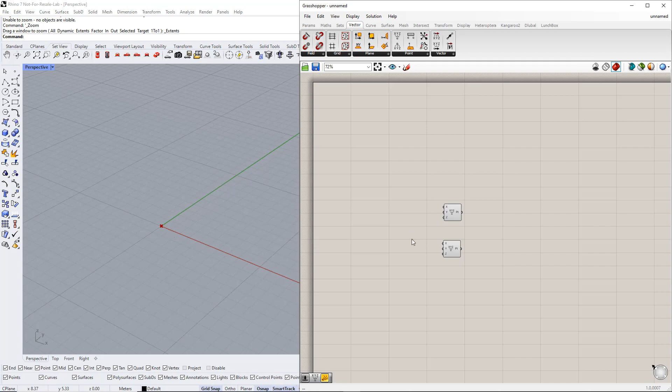For the second point, we set up a number slider for the x-coordinate, so that it can be easily adjusted later with the slider. We insert the number slider command from the Params tab and then double-click on it to change the lower and upper limits of this slider. We enter 1 for the lower limit and 30 for the upper limit.

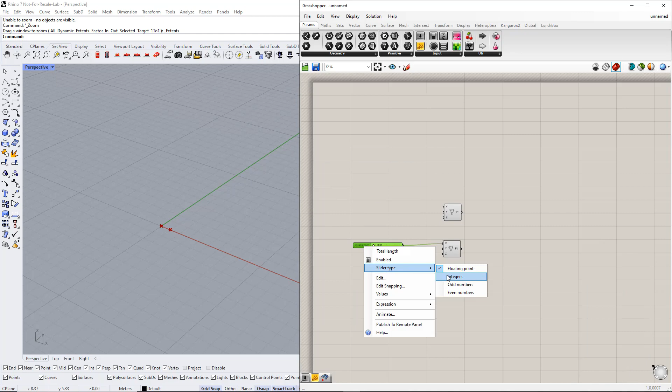We also enter a name for this slider, and for that we write total length. By right-clicking the slider, we can select the slider type, floating point, integers, etc. For example, we select integers.

After that, we create a line between these points using the line component. As you can see, when we click this line, it is colored green. Next, we determine the middle point of this line using the curve middle component, which is in the Curve tab.

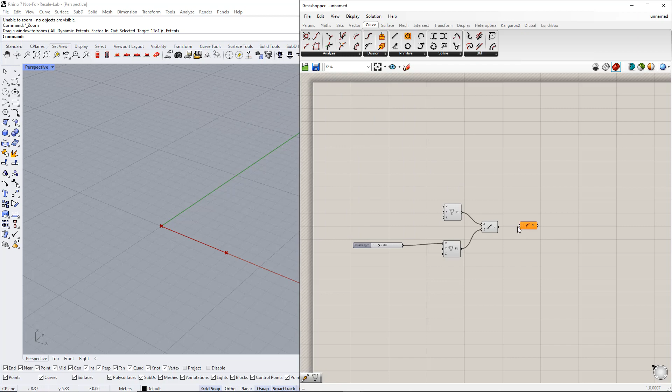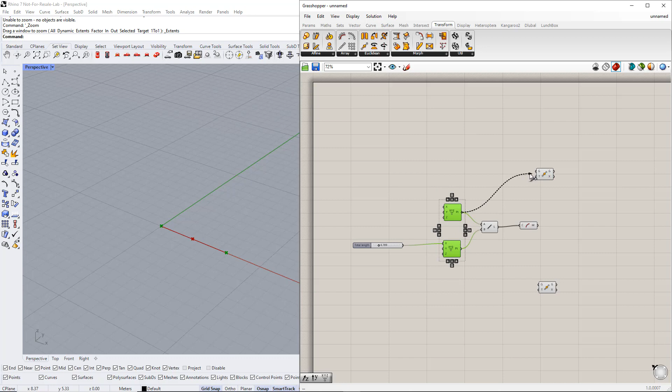In the next step, we copy these points using the Move component. You can find it in the Transform tab or double-click the canvas and write Move. Now we start to copy these points in the Z direction. First, we copy the base points. As you can see, by default this value is 10, and in the Z direction.

We need to insert the unit vector parallel to the Z-axis by using the Vector tab or by double-clicking the canvas, writing Z, and selecting this component. We set up a range, for example, from 1 to 5.

For this, we need to create a number slider. We can do this by double-clicking the canvas and writing 1, point, and 5. After that, we enter side height for this slider name.

For the third point, the middle point, we repeat the same procedure, but regarding the value in the Z direction, we insert the expression component. Double-click the expression component to open the expression editor and change the expression to x plus y, where x is the side height and y is the apex height.

For this, we set up a range between 0 and 5. After that, we enter apex height for the slider name. Then we create lines between these points using the line component.

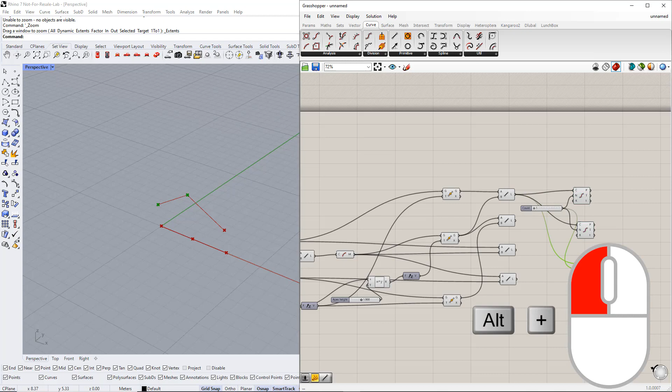Now we create the verticals as well as the diagonals. We begin with the verticals. First, we need to determine which points will be connected to each other. We connect the points of the first line from the lower chord to the points of the first line from the upper chord. We start with the first lines from the lower and upper chords, as you can see.

For the second lines from the lower and upper chords, we do not need to consider the first point, because it has already been considered. For this we utilize the Cull Index component. You can find it in the Sets tab or by double-clicking the canvas, writing cull, and selecting the component from the list. By using this component, we can choose a specific item to remove from the list.

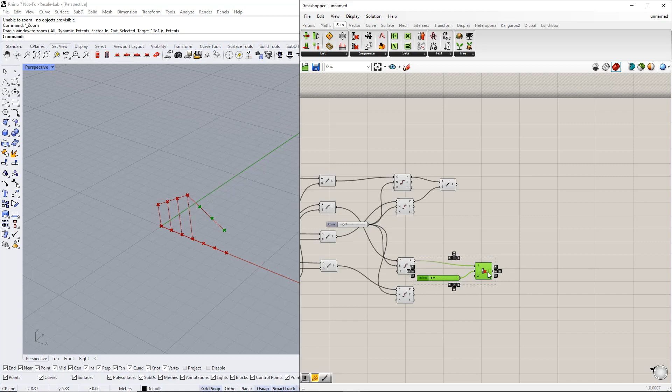Now we need to determine which item will be removed by using the number slider command. For this, we enter 0, 0, which refers to the first point of a list. We repeat this for the points from the lower chord. Afterwards, we connect these points to each other using the line component.

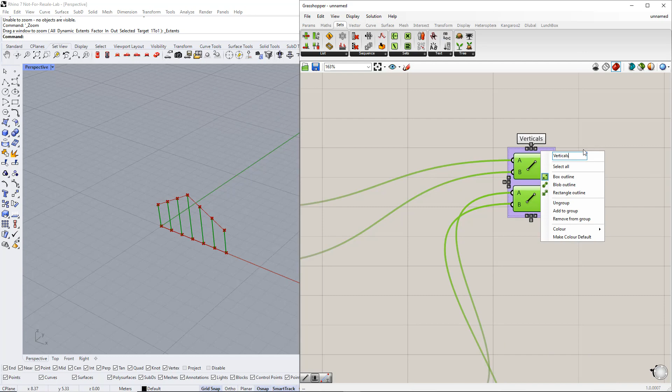We group these lines by hitting Ctrl+G and writing verticals for the name. Next we create the diagonals. As you can see, we connect these points in this pattern. Therefore, we do not need to consider the first point from the lower chord and the last point from the upper chord.

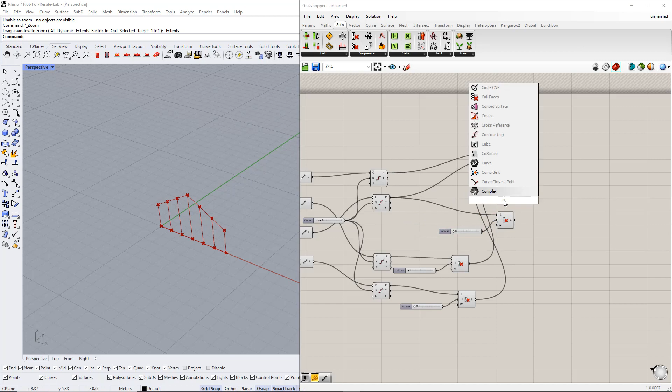We can cull them using the cull index component. For the first point, we have to enter 0 as index. 0 refers to the first point of a list. For the last point, we have to enter -1 as index. -1 refers to the last point of a list. We can add the -1 to the range by double-clicking the slider and changing the lower limit to minus values.

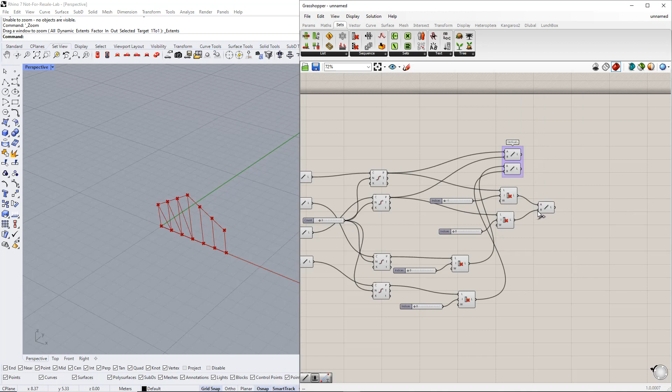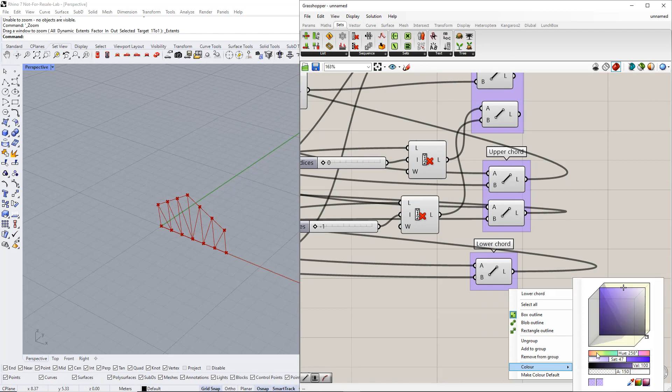Now we create a line between these points using the line component. We repeat the same procedure for the other side. Then we make groups and enter names for all the groups, as you can see. Next, we put all the number slider commands together in a group to control all the parameters easily.

In the next part, we create members for these lines. We insert this component from the Dlubal tab. We also need to define the member type using the value list command. For this example, we select the beam type. After this, we connect the line components to the Grasshopper line in the member component.

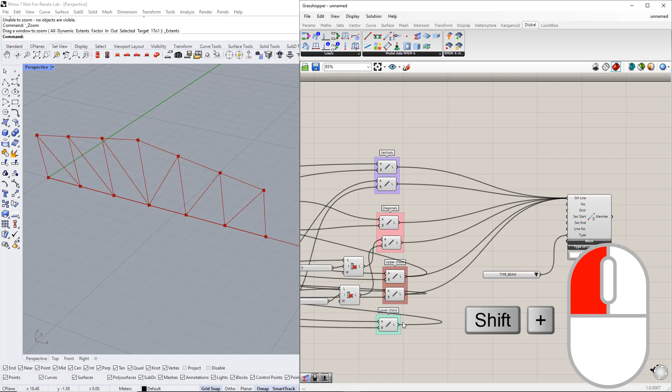In the next step, we define the cross-section as well as the material. For this, we insert the Dlubal components, section and material. Next, we insert the panel command to enter the properties of the section and the material. Now, we enter these properties. For the cross-section, we enter 1 as the section number, and R_M1 120/120 as the cross-section name.

For the material, we enter 1 as the material number, and C24 as the material name. Make sure that you use the correct RFEM terminology. Only then is it possible to export the elements correctly into RFEM. Afterwards, we connect the material component to the material number in the section component, and connect the section component to the section start in the member component.

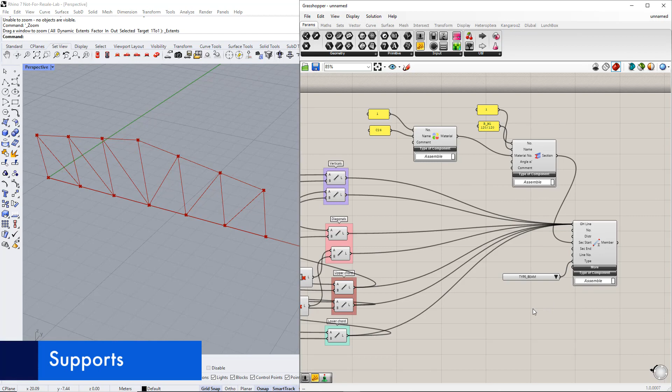Next, we define the supports. For this, we insert the nodal support component from the Dlubal tab. For the first node, we would like to create a hinge support using the panel command. As we mentioned in the first example, 0 means free, infinity, INF, means rigid, and in between, a specific number means spring. Then, we connect this panel to the respective support conditions. We repeat the same procedure for the second node but with other conditions, because we want to define the sliding supports.

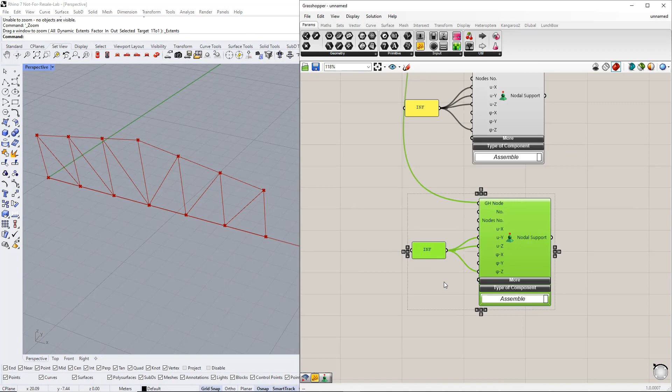To transfer this model data to RFEM, we need to insert the Dlubal component, RFEM6 export component. To start the export, we utilize the button command from the Params tab for this example. As we did in the first example, we can select units using the value list command. We can also overwrite the previous data in RFEM using the Boolean toggle command. This means all data in RFEM will be deleted before the export, once we switch to true.

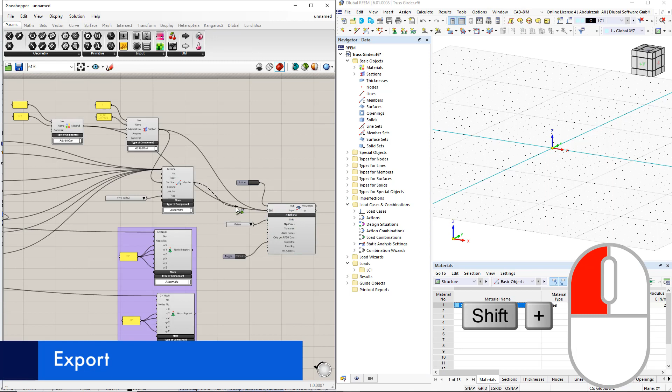After connecting all the components to the RFEM6 component, we double-click the button command to perform the export. All changes to the parameters in Grasshopper now have a direct impact on the RFEM model.